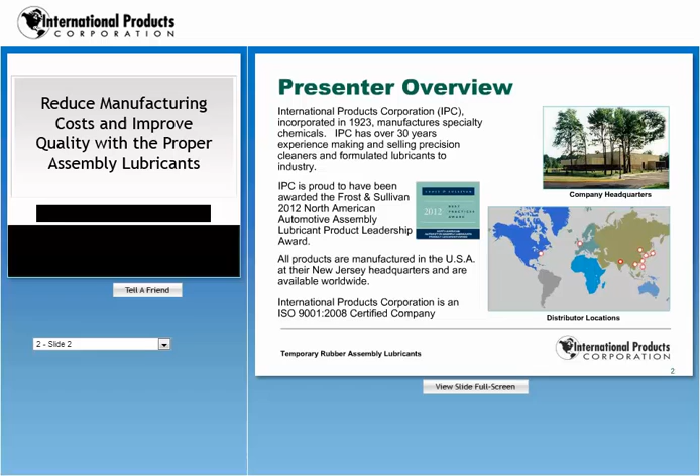Now I'd like to go over today's agenda. The first thing we'll cover is why use an assembly lubricant, what an effective rubber lubricant provides, how assembly lubricants work, industries and applications, what to consider in choosing a lubricant, commonly used rubber lubricants, and formulated lubricants. We'll go through some comparison charts, lubricant efficiency charts, lubrication over time charts, lubrication versus drying time, and some sample tests, and then we'll close and address your questions.

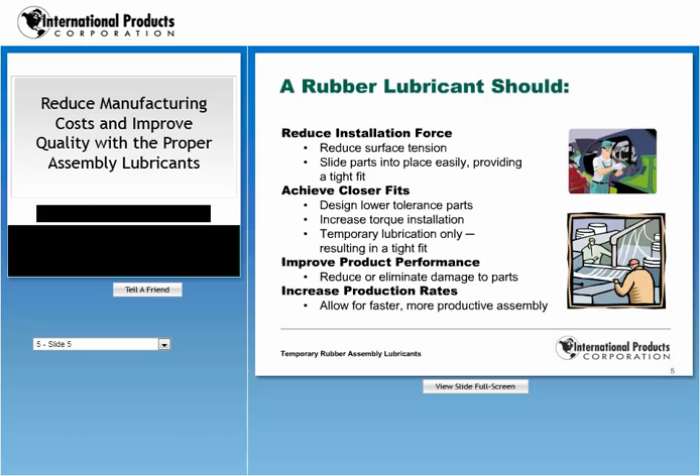All of this should lead to improved product performance and increased production rates. Also, you don't have to worry about the possibility of injuries. You can avoid musculoskeletal problems and carpal tunnel problems if you're using the correct lubricant. You should also notice reduced rejects of your parts. And finally, the product you're working with should be environmentally friendly and easy to dispose of. You shouldn't have to pay to remove hazardous waste, which could lead to greater costs for your facility.

So next I want to talk about how rubber assembly lubricants work. It's really a straightforward process. These lubricants provide what's called hydrodynamic lubrication, or also called boundary lubrication. They provide a thin film between two surfaces, one or both being rubber surfaces. It actually creates a gap or separation between these two surfaces. The lubricant should fill in these gaps and any holes or crevices that each of the surfaces have. And this overcomes the high surface tension of the rubber.

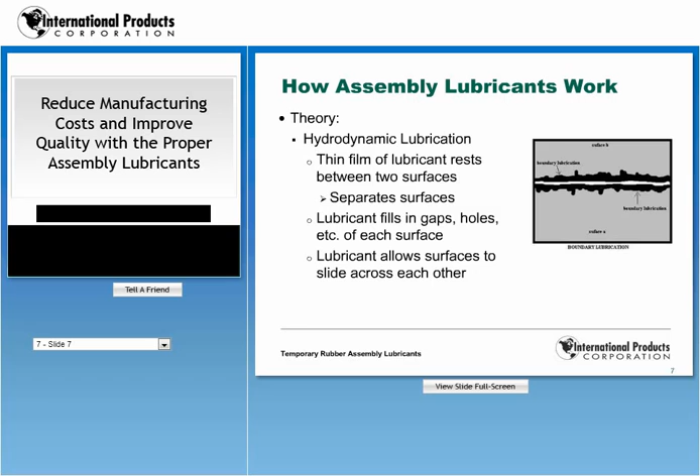When this is done, the lubricant allows the surfaces to slide across each other.

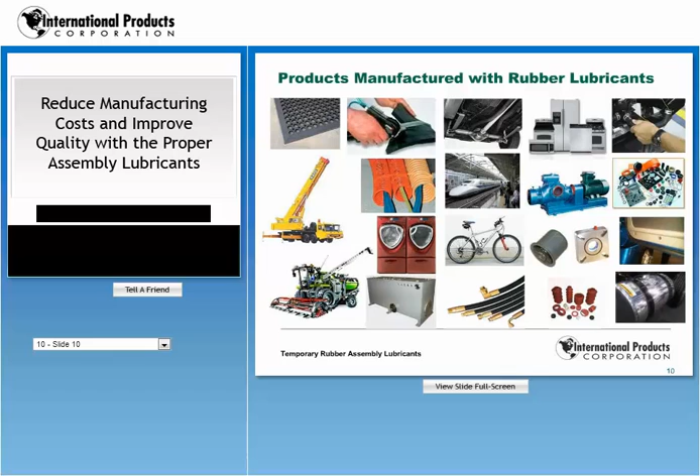Here's an example of some of the products that are manufactured with the rubber lubricants. It's a diverse set of products ranging from rubber floor mats to large cranes several stories high. Also, O-rings that are only several millimeters in diameter compared to tires that are 4 or 5 feet in diameter.

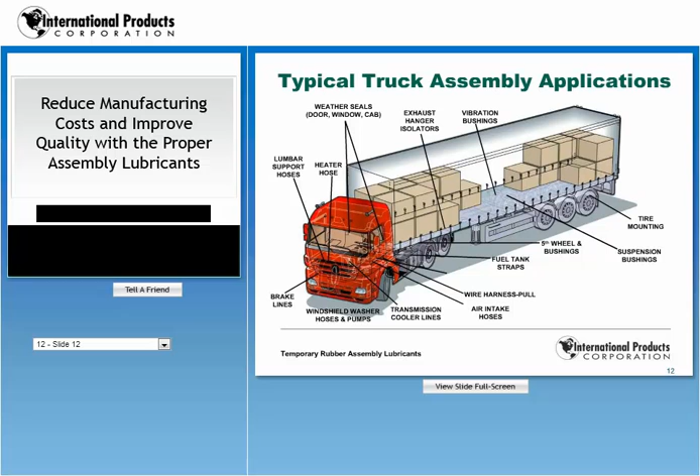Okay, when choosing a rubber assembly lubricant, there are some important factors that you need to take into consideration. First of all is compatibility. Will the lubricant affect the elastomer that you're working with and any adjacent parts that are most likely metal or plastic? The dry time: does the product need to dry quickly? Do you want it to dry in a longer time, say 1 hour, 2 hours, or even 5 or 6? And the residue: is it okay if the residue is conductive?

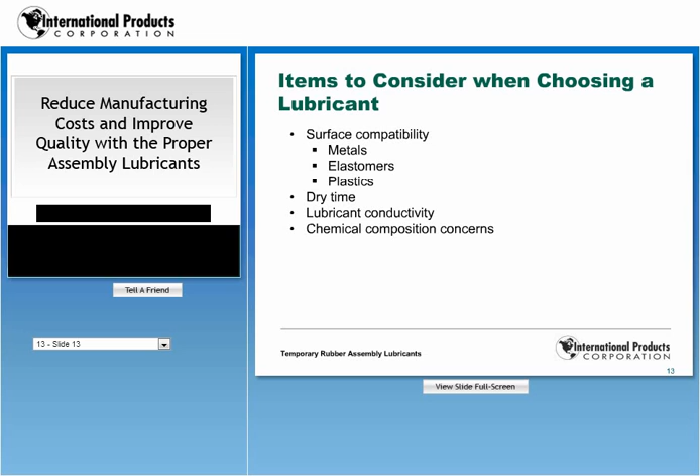And finally, the chemical composition of the lubricant itself. By nature of these products, handling them is routine. Workers are routinely exposed to them because they're manipulating the parts. So they should be safe to handle, and data should be available that proves that they're safe to handle.

Now, what's interesting about these lubricants is they're routinely considered an afterthought to an assembly process. The parts that were seen in the previous slide are all manufactured to exact specifications and tolerances. And then only when the assembly of these parts is being done, it's realized that a lubricant is needed to help get the assembly accomplished.

So what happens a lot of times is the closest chemical is used to do the assembly. More often than not, some of these are soap and water, alcohol, kerosene, silicone sprays, petroleum-based products such as motor oil, transmission fluid, power steering fluid, even Vaseline is sometimes used. There's a choice out there that is better than all the rest, and it's ester-based biodegradable choices. And that's what I want to talk about next.

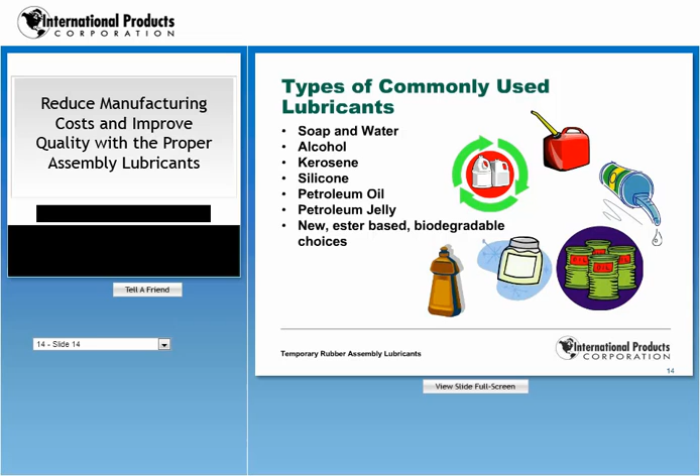So what's so special about these ester-based products? First of all, they're manufactured under controlled conditions. After they're made, their purity is verified, and their chemical properties can be tested. So you know you're getting consistent compositions and low impurities. When they're made with vegetable or plant-derived feedstocks, they have the added benefit of being green.

Also, esters have the reputation of very favorable compatibility. Unlike some of the traditional lubricants, petroleum-based products have a tendency to swell certain rubbers and damage plastics. Soap and water can actually cause corrosion of adjacent metal parts. And what's unique about the esters is if they come in contact with adjacent metal parts, the esters actually align themselves on the metal in such a way that they act as barriers to prevent water and subsequent corrosion from affecting the metal.

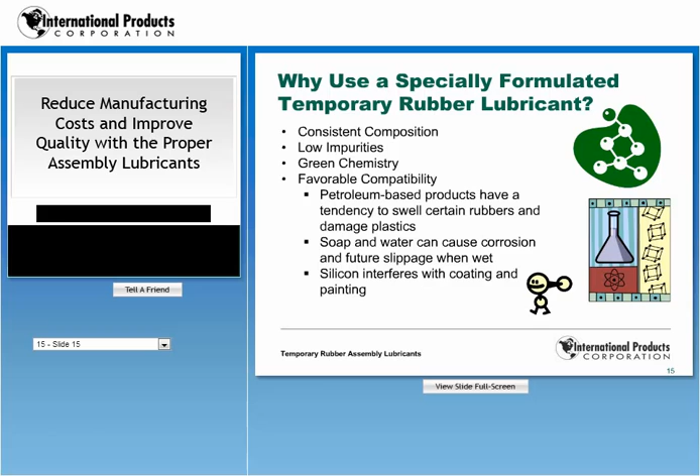Soap and water also can re-lubricate if they come in contact with water after the assembly. Also silicone - silicone is a great lubricant, it provides a sustained lubrication. However, if painting or coating is done downstream from the assembly, silicone will not allow that to happen successfully.

So what's so special about these esters? Well, their molecular structure is conducive to lubrication. The ester molecule is a specific arrangement of carbon and oxygen bonds, and this arrangement allows these elements to rotate around each other quite easier than other functional groups. And this is the essence of the lubrication. So a little bit of this ester product gives you excellent performance. So the adage, a little goes a long way, is certainly applicable.

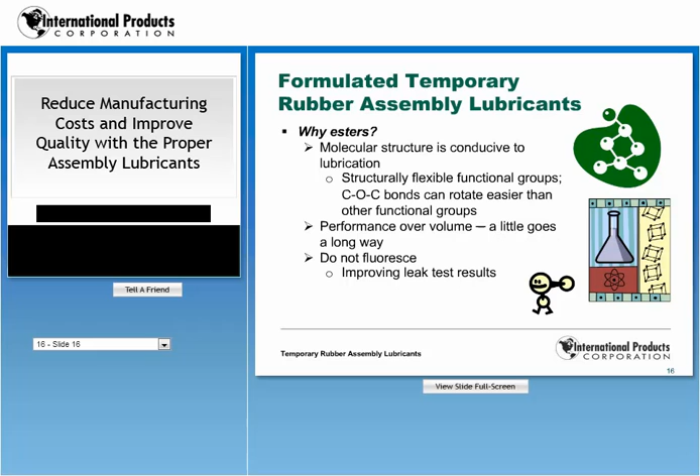Another benefit of esters is they don't fluoresce. Many people need to test their assembled products for leaks after the fact. And a lot of times, depending on the lubricant they use, that lubricant will fluoresce, giving a false positive leak test.

Esters are the first part of the assembly lubricant, but the real magic comes into play when they are emulsified. An emulsion is a mixture of oil and water. By adding emulsifiers to the ester, it partially dissolves the ester into water, and this creates an opaque, milky white appearance. And why is this done?

Because of synergy. The emulsion has better lubrication properties than the esters by themselves. The emulsion significantly reduces the surface tension of the rubber, and it allows the esters to get into all the nooks and crannies of the rubber. And this actually allows a very thin layer of esters to coat the rubber to get that hydrodynamic lubrication.

This is one of the reasons why these products are considered temporary lubricants. Because once the water portion of the lubricant evaporates, the ester film that's left behind is so thin and so minor that it can absorb into the elastomer and the part is dry to the touch. Unlike traditional lubricants, where you need to use a significant amount of volume in order to obtain the same amount of hydrodynamic lubrication.

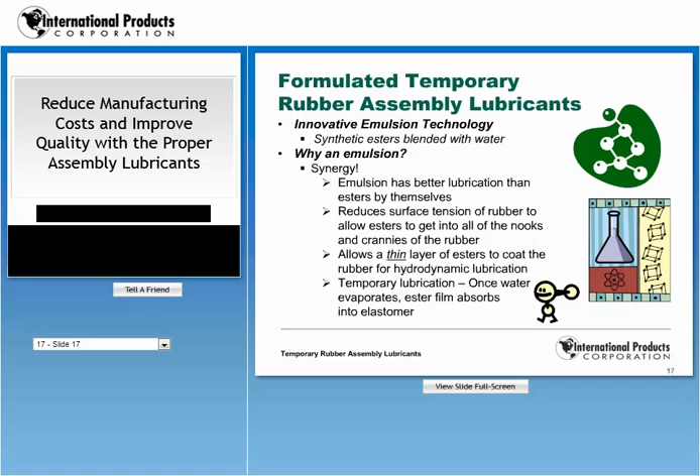Okay, to compare esters versus traditional rubber lubricants, here's a chart on the next page. Both types of products obviously provide lubricity and reduce friction. However, ester-based emulsions are truly temporary. Once they dry, they will not reactivate, and it will result in tight-fitting parts. They won't dry out the rubber, and like I mentioned earlier, the esters align themselves in such a way to prevent corrosion of the metal parts. The residue is non-conductive. Esters also are not flammable, and they have negligible VOCs.

Any excess emulsion can be washed away easily. They enjoy very good compatibility with elastomers, most plastics, and they do not swell any rubber parts. And then also, the treated assembled product can be coated and painted downstream. Finally, they're environmentally friendly and non-hazardous.

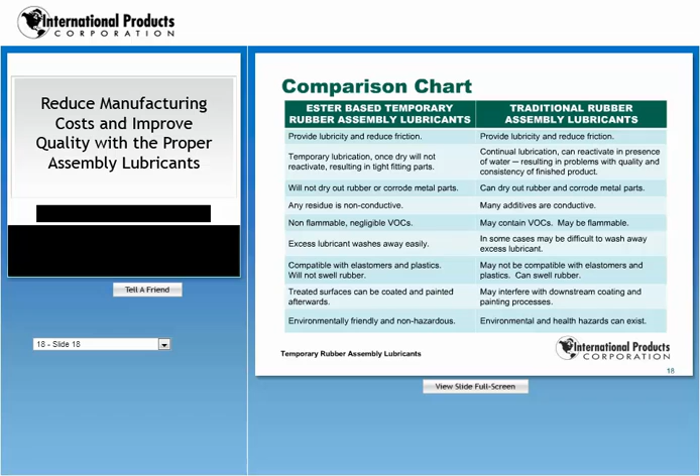Okay, here are some test results that we want to share that compares this ester technology with the traditional lubricants. If you look at the chart on the right, the percent reduction of friction, you'll notice the top bar is 71%, and that's the formulated water and ester emulsion. For example, if you have to install a tire onto a rim and it requires 100 pounds to do that without any lubricant, if you use one of these formulated ester emulsions, it reduces the friction by 71%, so that instead of using 100 pounds of force, you only need 29 pounds of force.

The petroleum-based products do offer comparable lubricity. It reduces that force to 39 pounds. The formulated surfactant-based lubricant, I'll talk a little bit more in detail with the next slide. Soap and water and solvents also provide some lubrication, but obviously pale in comparison to the esters.

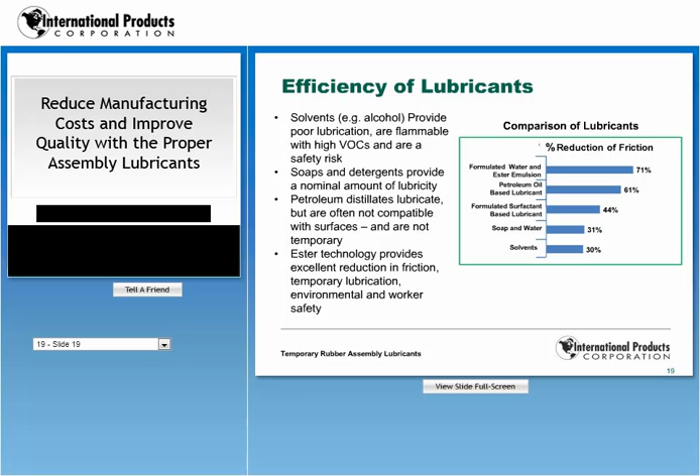So back to the formulated surfactant-based lubricant. Why would something like that be used when the esters are clearly better? Well, if you look at this next chart, it explains why. If you look at the blue line going across the 100% friction value, that corresponds to water used as an assembly lubricant.

So again, if we go back to the example of putting the tire on the rim, even if you wet the tire before you do the assembly, it still requires 100 pounds to accomplish that assembly. If you look at the green line down at the bottom of the chart, that corresponds to a line of ester-based products known as P80.

That reduces the friction to only about 30 pounds. But if you follow that line all the way along the x-axis, you'll notice that it slowly increases and it returns to 100%. In other words, after the water evaporates and the esters get absorbed and you try to remove the tire, it's going to require 100 pounds to remove that.

Now if you look at the silicone spray and the 75 mineral oil, you also get pretty good lubrication. But as you follow those lines out, you see they don't completely dry, and their lubrication is not so temporary. The reason is silicone has a tendency to be an excellent lubricant, and it tends to stay around for quite a long time. On the other hand, mineral oil, because you have to add a significant amount of volume to get that hydrodynamic lubrication, you're always going to have excess on your parts.

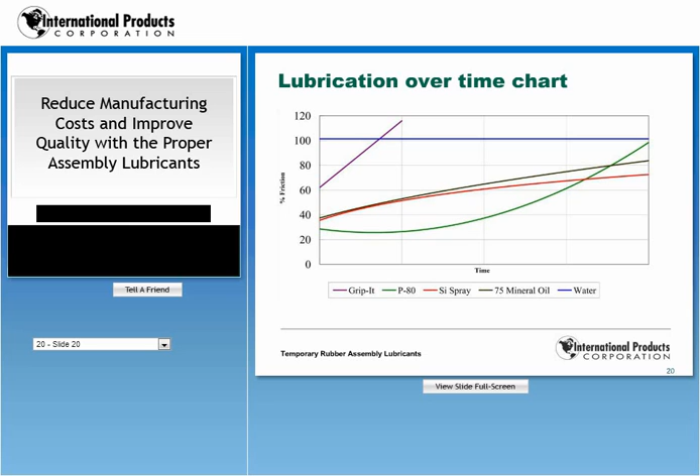But notice what happens as it dries - it actually increases above and beyond the dry assembly force. So again, going back to the tire example, if you install the tire using P80 Grip It, you need 60 pounds of force. However, after it dries and you try to remove it, you're going to need anywhere between 110 to 115 pounds. So that Grip It does provide some lubrication, and it also provides a tacky residue to promote the parts to stay together.

There's another way of looking at the data. P80 Grip It reduces friction by 40%, if you see that on the top left chart. And if you look at the chart on the right, its dry time is only 20 minutes. Going back to the chart on the left, the bottom one, P80 Emulsion, clearly the best lubricant, 70% reduction. It has a dry time of 1 hour.

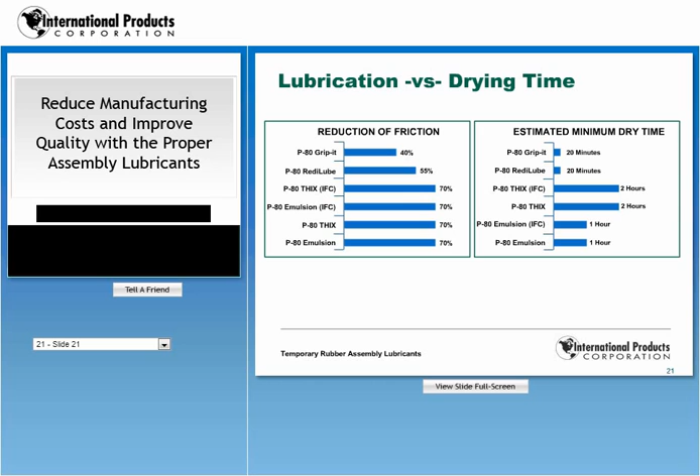Now everything in between are different variations of the ester technology. Depending on your application, you may choose one over the other. For example, RediLube has almost as good lubrication as the P80 Emulsion, but it has a much quicker dry time. The P80 products abbreviated IFC stands for Incidental Food Contact - they're used for FDA-regulated industries. And finally, the P80 THIX corresponds to gels, which has benefits for certain assembly applications.

So now that we've talked about the benefits of the ester emulsions, I want to mention some of the data that should be available to you so that you can make informed choices in choosing the product. There are many different tests available to evaluate the compatibility of the lubricants and anything that comes in contact with them. Metal compatibility, elastomer compatibility, and plastic compatibility all have ASTM test methods. So there should be data available to give you a level of comfort to know that the product is going to work successfully in your application.

Also, lubrication tests should be available. How well does the lubricant work in your specific application? These tests are usually done with force gauges, and in certain situations, your parts can actually be used as the test.

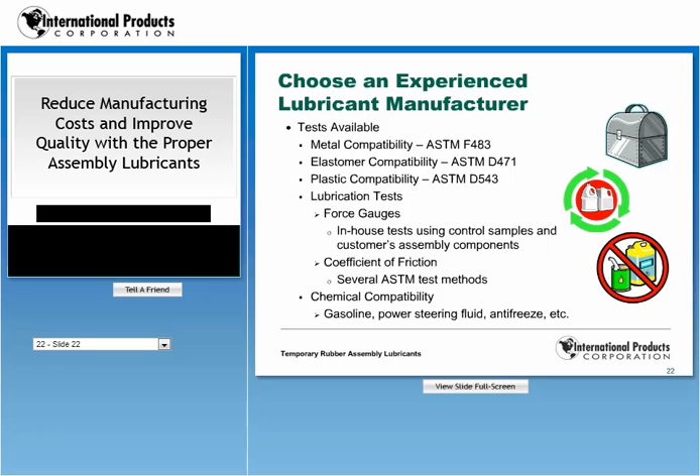Finally, chemical compatibility. Many people want to know how does any residue affect a chemical that will eventually come in contact with it? For example, antifreeze, power steering fluid, gasoline. Will the addition of a lubricant residue darken the product? Will it cause a precipitate? Will it lower the boiling point? These are some important factors that need to be considered.

The next chart shows elastomer compatibility of several P80 products, and I'm going to go through these quickly. But keep in mind you can download the entire webinar so that you can look at these slides in greater detail. Essentially this chart shows the percent swell of different elastomers when immersed in different lubricants. The 4 different P80 products are listed on the left, water as a control, and then finally mineral oil because it is routinely used.

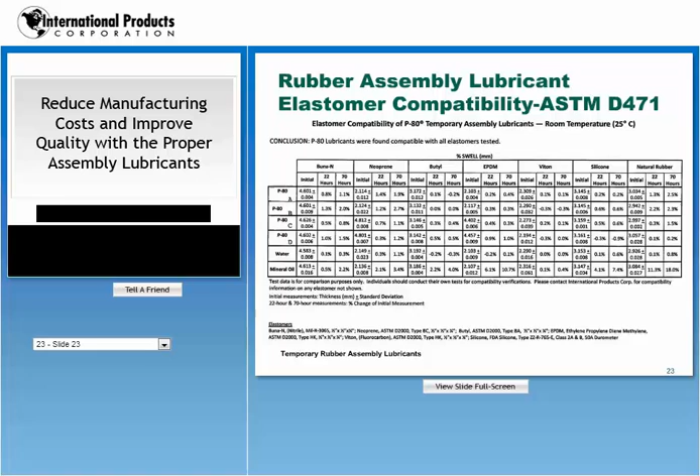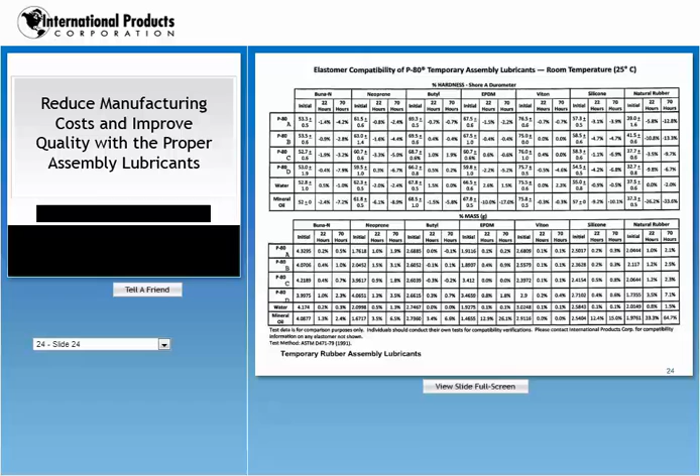The next chart is presented in the same format. Instead of swell data, it's percent hardness using a durometer, and then percent mass - how much does the elastomer coupon absorb the lubricant?

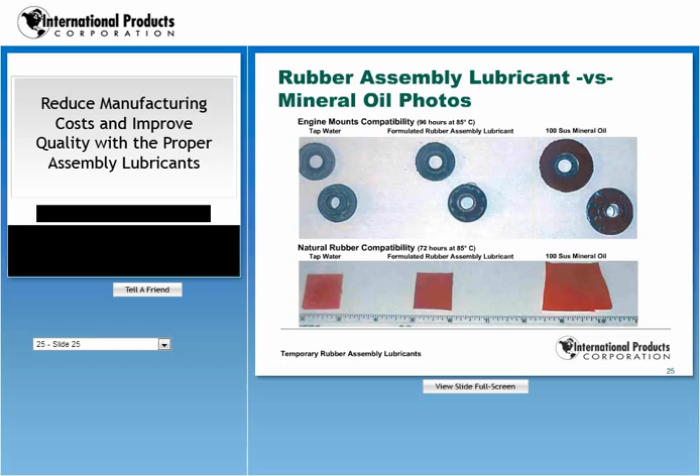The same type of test can be run on customers' parts. If you look at the photos at the top, engine mounts - these were soaked in tap water as a control, a formulated rubber assembly lubricant emulsion, and then mineral oil. And you can see the significant swelling that occurred with the mineral oil. Same type of analysis was done on natural rubber coupons, cut 1 inch by 1 inch, and again the same type of test was performed: tap water, formulated rubber assembly lubricant, and mineral oil.

Also, specific tests can be tailored to suit your needs. For example, one customer wanted to know the effect of lubricants with radiator fluid, with coolant. So a test was set up, basically comparing any darkening that would occur with certain metals before and after exposure. A digital imaging technique was used to notice any differences after certain exposure times, with different samples prepared: water, the coolant by itself, and then different amounts of the lubricant residue in the coolant.

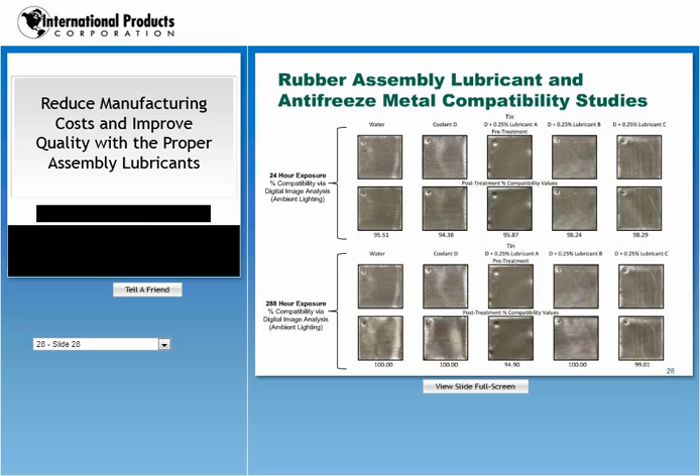Spectroscopic techniques can be used to further evaluate the effects of the lubricant with any particular product. The two smaller charts on the left use UV visible technique to determine any darkening a lubricant has on a specific coolant. The top chart shows that if 0.25% of a lubricant is diluted into a certain antifreeze, you will see a slight darkening. However, the chart on the bottom shows the curves are perfect overlays, so there is no effect in the color change. The chart on the right is an FTIR scan, which can be used over time to see any changes that happen at a molecular level, if there's any reaction that occurs when the products are mixed together, the products being the coolant and any residue from the lubricant.

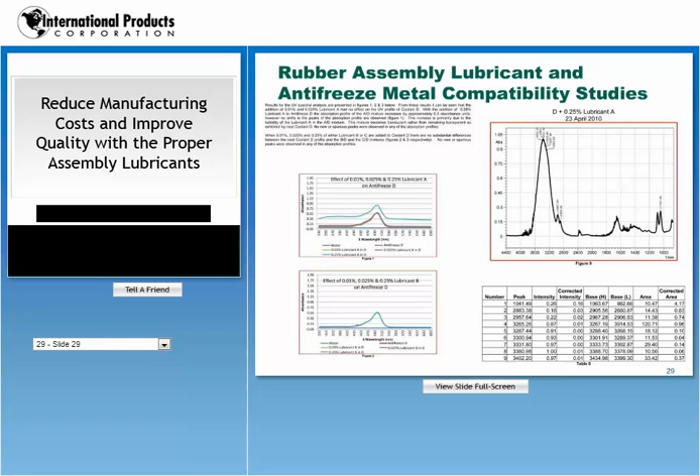I just want to briefly summarize what we discussed about ester emulsion technology before I hand it back to Michelle. In order to be a truly temporary lubricant, these products should not contain any silicones, and they should not contain any petroleum distillates, from a performance standpoint and also a compatibility standpoint. The esters alone have excellent surface compatibility. There should be no metals in temporary assembly lubricants.

They're not needed, and furthermore they'll also provide a potential for conductivity once the parts are in place. You have to be assured that the lubricant does not harm adjacent surfaces. They have to be safe to use and dispose of. They must be ergonomically beneficial. And then if too much is applied, they can be easily removed with soap and water.

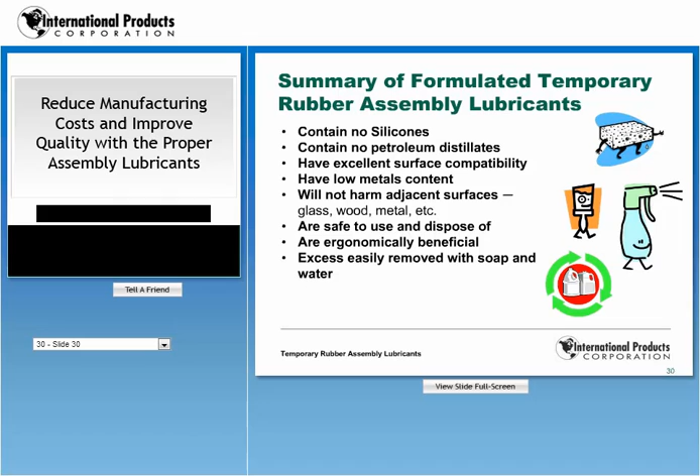Finally, they need to be versatile. You should have choices available, so you shouldn't have to redesign an assembly process to accommodate a lubricant. So you should have application choices. If you like to use a brush, a dip, or a spray can, it should be fine to work with. You should be able to manage the volume applied. Finally, you should be able to select the proper lubricant based on the type of application.

For example, if you're doing installations overhead or out of reach, perhaps it's easier to use a gel instead of a liquid. And then also, if your elastomers or plastics are not that porous, then you should be able to choose a product that leaves essentially no residue versus one that, if you over-apply it, will leave a residue. And finally, they should be easy to use. You should be able to open it up and use it instead of mixing several components together or diluting it with water beforehand.

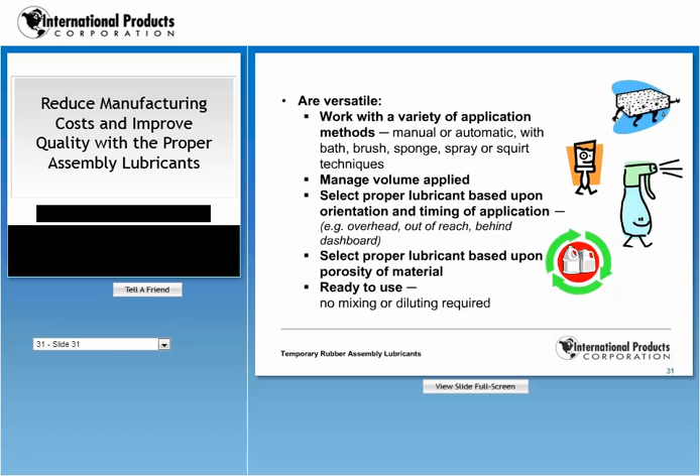Thank you, Tom. There's a number of technologies available from International Products on formulated lubricants. They include liquid and thixotropic formulas. Now, thixotropic basically means that the material will thin itself out where it can be used in sprayer bottles, and then it returns to its original gel state once it hits the surface. Also, water-based products, solvent-free products, negligible VOCs, and biodegradable products.

Many formulated lubricants offer a number of benefits, including superior performance, excellent compatibility, quality assurance, and consistency. And then working with the specialty manufacturers, we can give you technical know-how and experience, as well as on-site laboratory for product performance and compatibility testing.

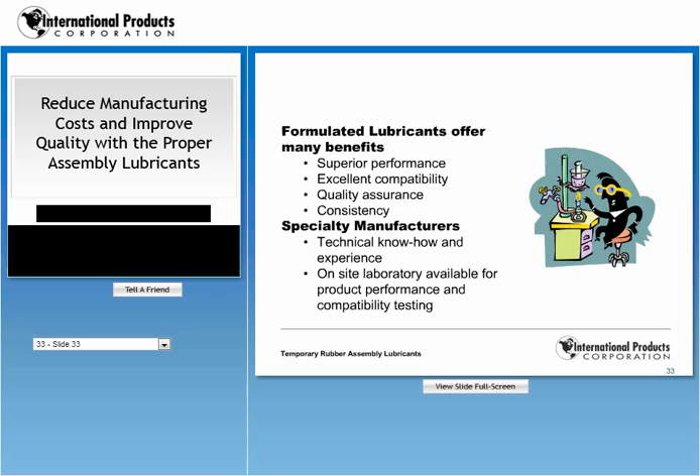In closing, we just want to review why temporary assembly lubricants are ideal for rubber assembly. You have tight-fitting parts, fewer rejects, and quality control and testing to ensure ingredient consistency. They also need to be safe to use, non-toxic, easy to handle, and easy to dispose of, have excellent surface compatibility, result in fewer injuries, and have technical support and data. There's also a number of NSF-certified formulations for food contact applications.